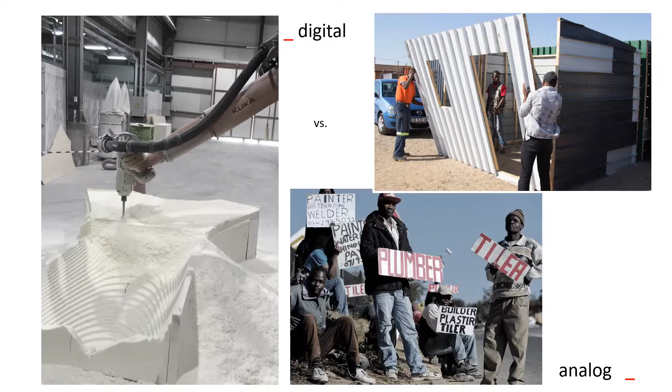What is appropriate technology where you sit with the harsh reality of unemployment, but also the opportunity of informal systems, but where technology and digital manufacture have not yet got a foothold, and the opportunity offered by these new technologies have not been explored? I still believe in the Heideggerian principle, where making equals meaning.

I don't believe that manufacturing should be something outsourced to such an extent where the source of an item is unknown or possibly unmeaningful to the person actually dealing with it. I explore open building and the disentangling of primary, tertiary and secondary systems as an opportunity to bridge this gap.

Breaking buildings down into clearly defined elements offers the potential of outsourcing manufacture to small and micro enterprises. The tolerances and integration of elements is done by the architect in the digital realm. Assembly is done by unskilled labor on-site. The catalytic nature of mobilizing these micro enterprises can be highly impactful on an economy with huge unemployment.

We design not to simplify the management of the contractor, but to allow for establishment of new industries and micro enterprises which can be funded by community banking. New small factories or bureaus utilizing digital tools to close the gap between formal training and market access. It's easier to teach someone to operate a CNC machine than to train a master carpenter.

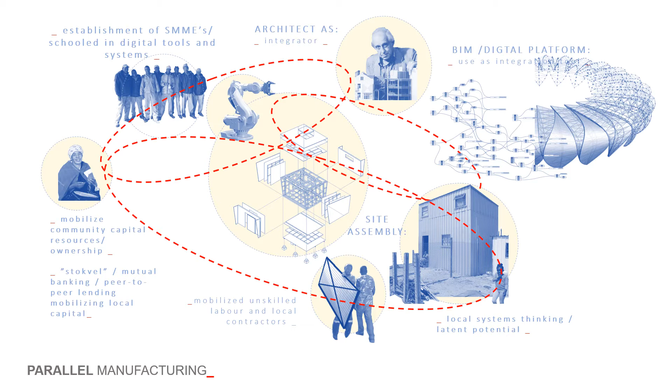This schematic illustrates the idea of mobilizing small and micro enterprises with digital tools funded by mutual banking or stokvels, where the architect as integrator in the digital realm uses new tools to design these disassembled or disentangled components which can be assembled on site by unskilled labor.

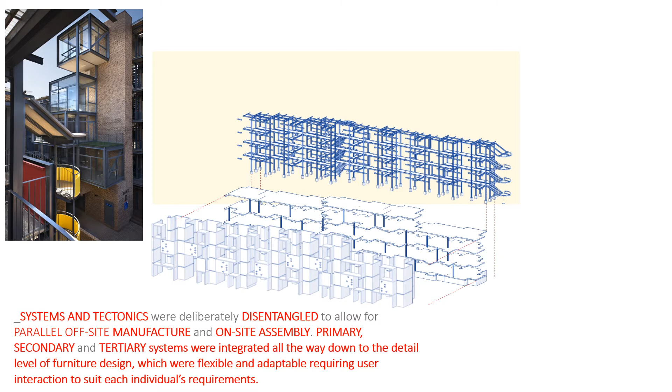The brief called for 280 housing units, which we broke up into the precast concrete elements forming the main habitable space, and steel walkways which also carry all the services. Precast elements were used as primary structure. It was U-shaped and L-shaped elements.

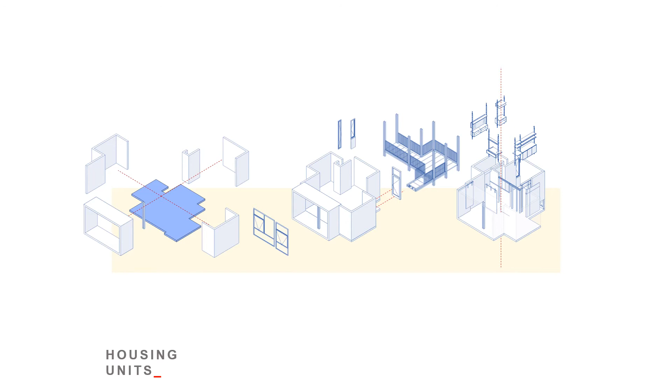As secondary elements, I regard the windows being installed after the concrete was installed, with the furniture being your tertiary elements, which also offer the opportunity of further disentanglements, allowing for finer grain manufacture. All the furniture elements were assembly elements consisting of posts, props, counter elements, shelving. All of these can be manufactured in separate factories, then brought to site and assembled.

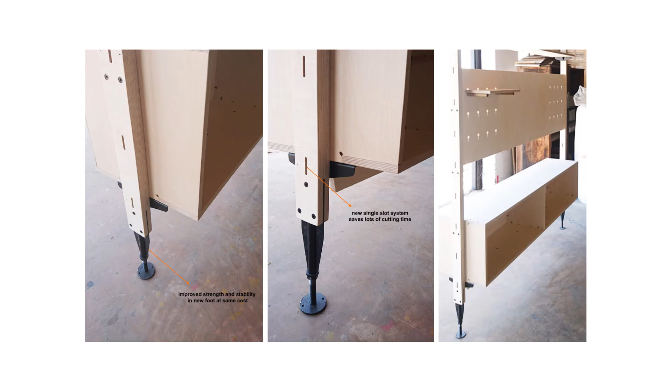An illustration of the posts and the props, which allows for versatile installation and also installation where the primary structure is not damaged during installation. These elements can easily be removed and added as required.

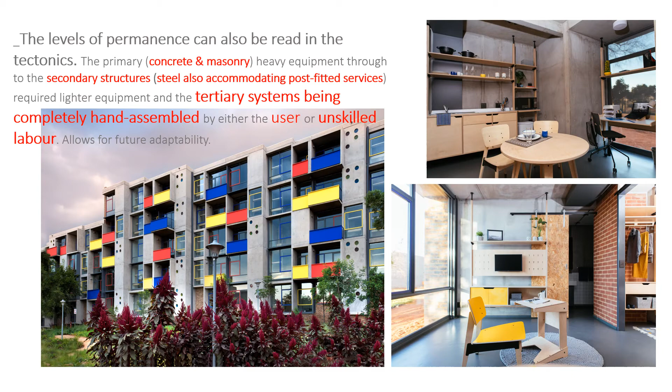The legibility of the building is clear in the sense that all levels of permanence can also be read in the tectonics. The primary, which is concrete and masonry, requires heavy equipment, through to the secondary structures, which is the steel and the aluminium, requiring lighter equipment, and then the tertiary systems being completely hand assembled by either the user or unskilled labor allows for future adaptability.

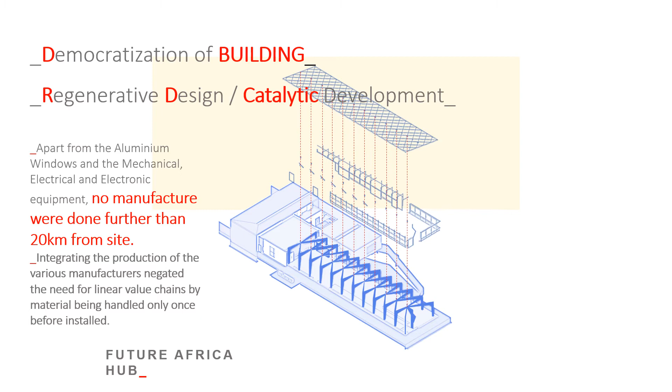This democratization of the building industry, which also forms the basis for a regenerative design or a catalytic development, is what was implemented at the hub, which is basically a dining hall. With the hub, the building was completely assembled on site by 8 unskilled laborers.

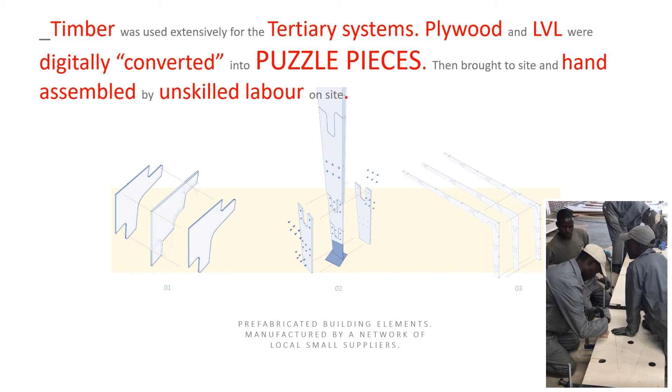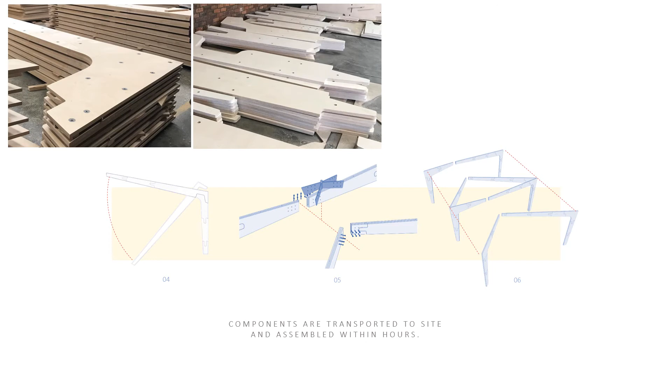Timber was used extensively as the tertiary system. Plywood and LVL were digitally converted into puzzle pieces, then brought to site and hand-assembled by unskilled labour. Illustration of the puzzle pieces, and then the engineered connector, which allowed for fairly simple installation and erection. No heavy equipment was used, and the design also allowed for a very rudimentary plant to assemble the building.

The hub building was assembled by 9 previously unskilled labourers. Elements were all kept to a scale which can be handled by a human hand. Steel elements were designed within specific weight and size restrictions to allow elements to be carried by labourers.

Opening the building industry up to allow for small and micro enterprises to participate in large projects is key to the project. Not one of the contractors responsible for the manufacture and installation of the tertiary systems have ever worked on this scale, nor have any produced anything of this nature.

Using companies with established infrastructure is seen as low risk, but the increased cost and rigidity of these industrialized organizations do not allow for innovation, nor do they provide the opportunity for meaningful associations. The level of ownership taken on by the small contractors resulted in immense pride, meaning, and a sense of accomplishment, traits that have been lost to our industry since the Industrial Revolution, when labour was reduced to commodity.